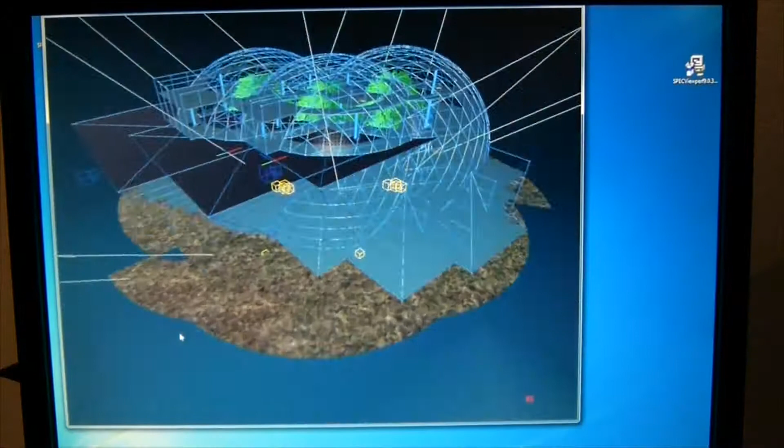So Intel's not in as bad shape as they could be, and honestly I think it's due to AMD screwing themselves over. That's something I messaged Coreteks about after his video - I sent him a giant wall of text, and he and I are going to have a discussion in a couple weeks about what he covered. He's right on all his points, but I think it ultimately comes down to AMD not knowing how to market - they just don't know what they're doing.

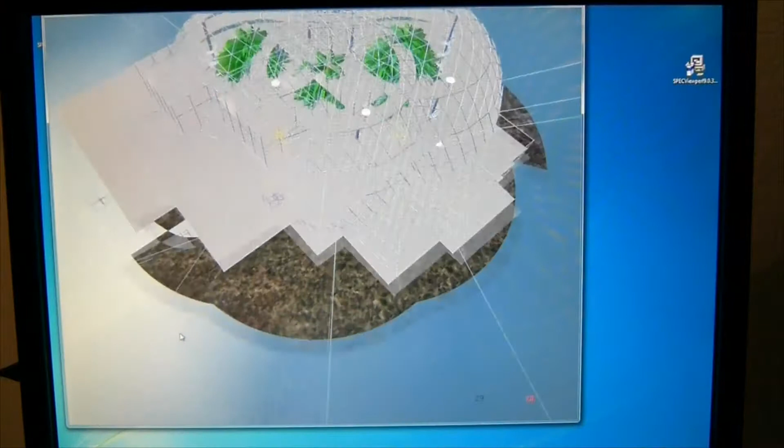I'll try to save some of the prediction stuff for what we expect next year. I do want to come back to the subject of threads and how long they'll last, but before that, I think I just took up the beginning of the conversation with expectations.

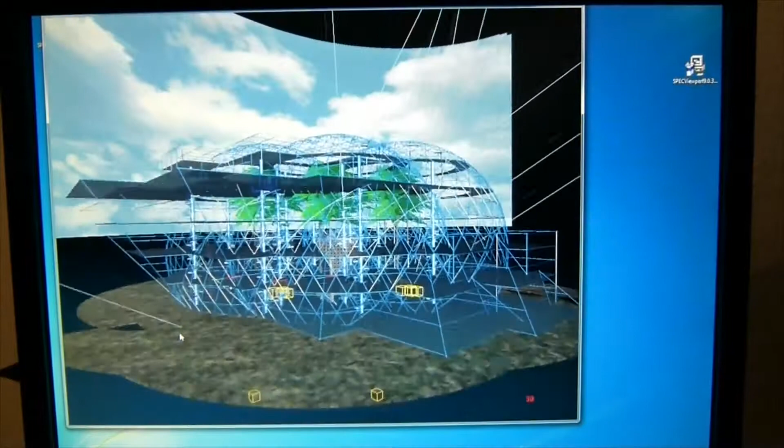To be honest, what I remember at the turn of the beginning of this year was that the hype around AMD was at a fever pitch, more than I've ever seen. Terrible Q1 earnings, but it still spiked up through the roof. Nobody cared - that's how good expectations were, that even a poor earnings call and everybody just bought in. And everyone was just non-stop talking about Navi and Zen 2.

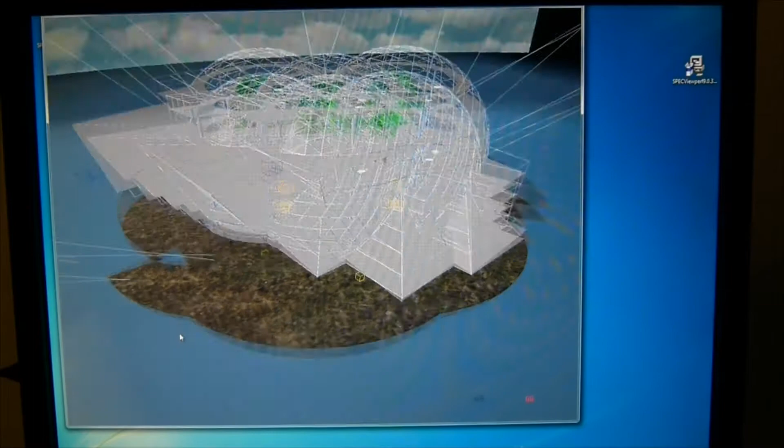Which I'd say in retrospect, I think Zen 2 met expectations. I know some people don't think it did, but honestly it uses less energy than I expected, and it's better at certain things than a lot of other people expected. No, it doesn't hit 5 gigahertz though - that's really the only thing you can say, at least for the ones they're selling. I think we were expecting higher frequency but lower IPC. So we got higher IPC but lower frequency.

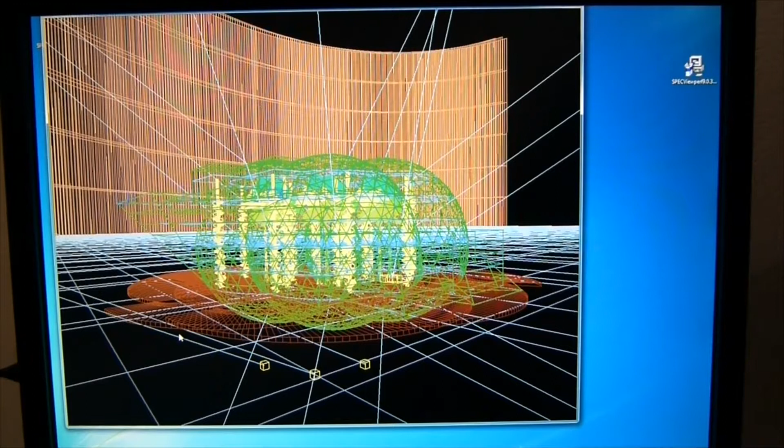So I agree, I think they hit the real-world performance targets that we all wanted them to. It just, they went about it in a slightly different way - instead of bigger numbers on the box, which people that don't pay attention don't really understand. But yeah, their IPC gain was huge.

If we're being honest, my first video - I made a couple that were terrible. In fact the first one I never even released. I might watch it with Dan and just release the audio in the podcast, and Dan can describe how stupid I look. But the one that actually got some views was 'Reality Will Catch Up with Intel.'

And I think this ties into what we were just talking about - I agree, for the next year Intel can get by doing what they're doing. They don't really care that much about Cascade Lake, and frankly they just sell those to OEMs. In that video I recently did talking about how they have a price for OEMs that's not even just half as much - it's really, on average, about a third as much as what they're charging on Newegg.

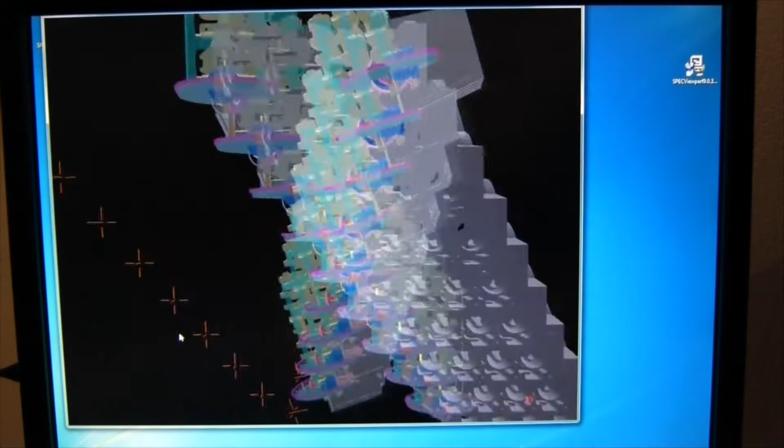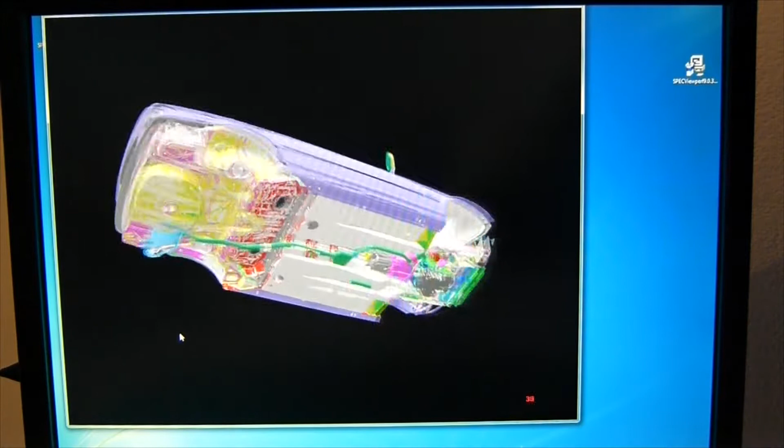You can never be sure with that, and Zen 3 could be that little bit more needed to push things over the edge. Something I talked about in my last podcast near the end there is worse - the difference in gaming performance between the 3600 and the 9900KF, something almost triple the price, is like 15%. I don't know, it's about 5%. Yeah, it's 5%. So here's Intel's race against time.

AMD right now just completely clobbers Intel in everything but gaming. But people will buy those CPUs if they game 5% better. They will, and Intel's got the name brand recognition.

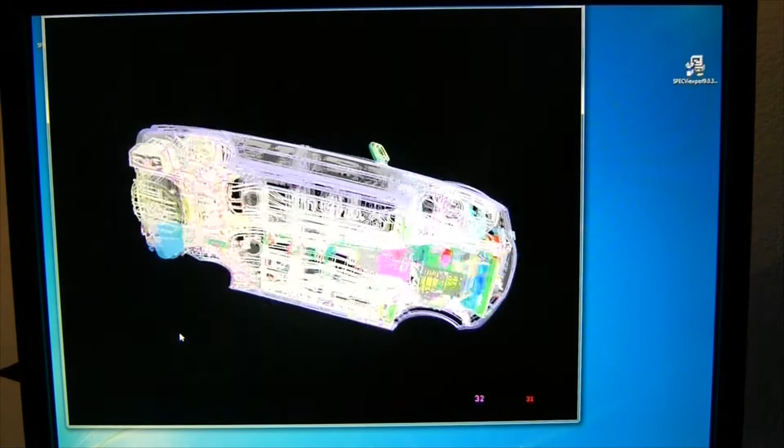However, if AMD's Zen 3, it's a new architecture, they're redesigning the CCXs - if that gets 10% more IPC, which I don't think is out of the question, and it does get at least what they say, about 100-200 megahertz higher, if the problem isn't that the 4900X 12-core now beats the 9900KS in gaming - that's not the problem for Intel. The problem for Intel is that when you move up AMD's single-threaded performance by, let's say 15%, or even just 10, now AMD's $200 CPU beats Intel's top chip probably at everything.

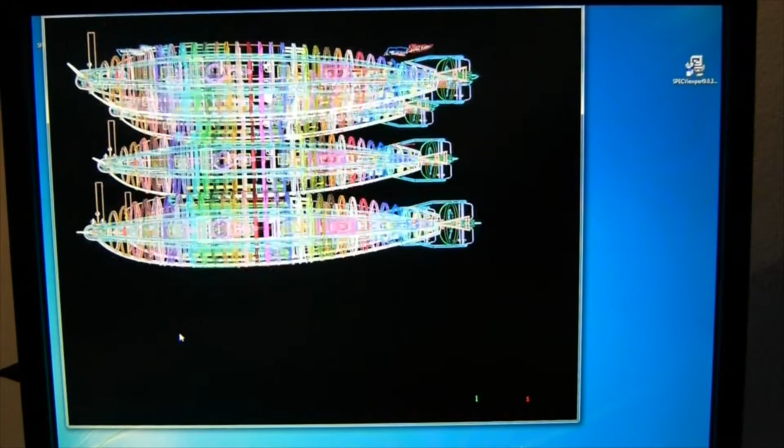That's the problem Intel has to worry about at the end of next year, I would say. So I'm thinking they get away with it for now. But as things stand, their AMD lineup's a joke. At least in Europe, people are buying AMD in larger numbers. Seem more discerning than us, I guess. I don't know. And once you move that single-threaded up by 10%, it's just complete game over, not just in the high end, but it's like what you price a 9900 at.

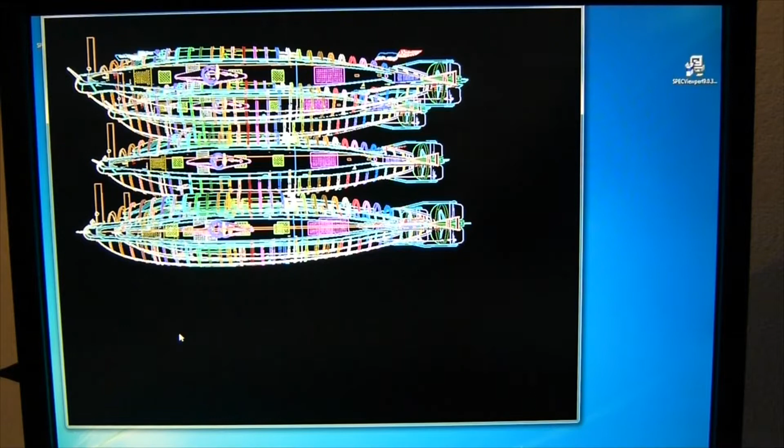If they feel that, okay, yeah, they're beating us across the board, we're losing sales, well, we're just going to knock - or they'll probably do it in small increments. They'll knock like 25% off, get a bunch of sales, knock another 25% off, get a bunch more sales. They can just keep going down, and AMD could follow if they wanted to, or come out with cheaper SKUs or whatever. But honestly, I think Intel's just trying to wait out the clock.

Exactly, I think that. But there is a very real clock there that will affect them if they don't hit it. Right, but if you look at the Pentium 4 versus the Athlon XP and then the Athlon 64, it lost to both - pretty bad to the XP and then horribly to the Athlon 64. And that was a good 4-year period there that Intel was basically irrelevant.

They were completely worthless and worse at everything across the board. And they were still able to ride out that storm. The big thing was that they had to come back big. Now here's the thing, and this is the reason why 7 nanometer matters.

10 nanometer doesn't matter to Intel. It's not going to give them what they need. They need to get to 7 nanometer, before TSMC if possible, and before AMD can get their products onto it. And what they really need to do, their equivalent or whatever - yeah, they're 5 nanometer, yeah.

So they need to regain some sort of advantage, or just come out with an architecture kind of like what the Core 2 was, that was so much better than what AMD could possibly have. So imagine if Intel had a 200% IPC increase on their next CPU. It sounds impossible because we haven't seen such things in a long time.

Golden Cove should be 40% better or more than Skylake. And I think some people hear a 40% IPC increase and say that's impossible. I'm like, well, it's been a while since Skylake came out, guys. A 40% IPC increase in 2021 isn't just - that's expected. They better get at least 40% by then because AMD is increasing IPC too.

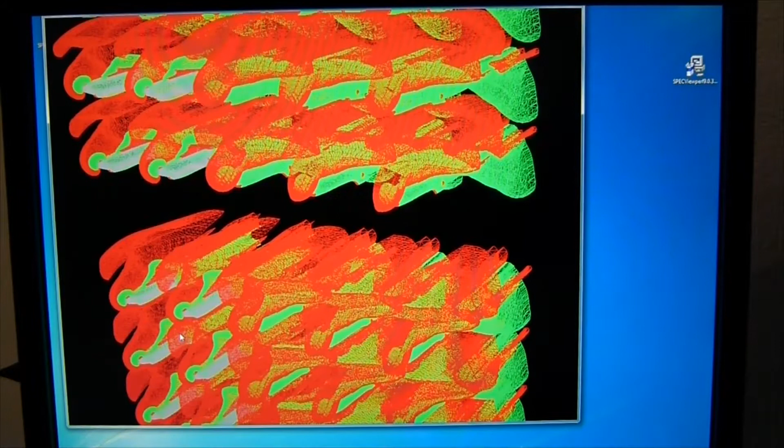Right, and with AMD constantly increasing IPC, Intel could come back in the game if they hit back hard - if they get the 3D stacking done first, there could be massive IPC gains there with on-die DRAM and stuff like that. That could get you a 100% IPC increase, in theory, if they do it right. That's what TSMC was talking about at Hot Chips for half the presentation.

It absolutely could. Yeah, if they come back and just make Zen 5 look ridiculously slow, even though it's such a massive leap for them, Intel over Intel, it's not impossible, and as long as they have the time to get there, there's always that chance. So I think it'll be fine for them, and like I said, the most telling thing is the reaction on Wall Street.

The Q3 earnings for Intel was a giant boom, they just skyrocketed after their Q3 earnings. I was expecting AMD to have a similar reaction because Q3, Zen 2 was out, Navi was out, so that should be factored in. And they did not care. AMD's stock is up since earnings, but it dropped immediately as soon as earnings came out.

Part of it's due to the fact that AMD doesn't know how to sell and market. I actually read the earnings report because I lost $200 on AMD that day. I'm like, come on guys. It was mostly due to the fact that they don't know how to present their own information. They might be very smart, very technically engineered, their engineers might be very good, but they don't have a single person in there that knows how to sell anything.

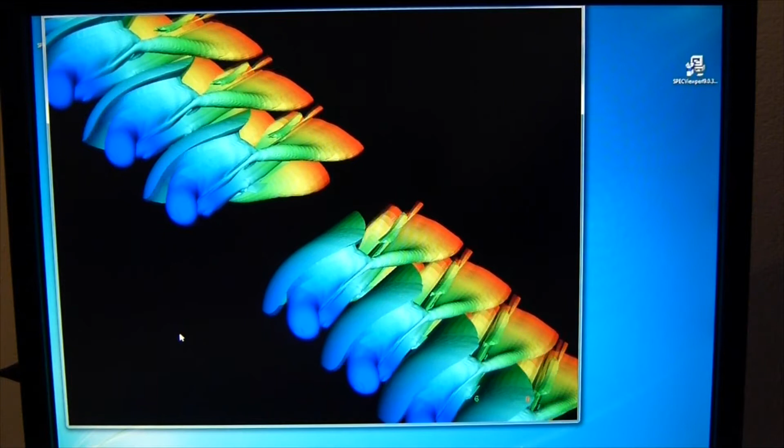What they did is they lumped their enterprise sales with their semi-custom. So we're at the end of a console generation, so their semi-custom could be down like 8,000%, going through the floor. So what that did is they took all of their EPYC sales, all their Rome sales, and dragged that through the floor with it. It made it look like they were losing so much ground in the server market.

Now for those of you that don't play in the stock market, you have literally 3 seconds to read this giant report and make up your determination whether or not you're buying or selling if you're already in. So you have to be super fast with this, and when you see the highlighted numbers...

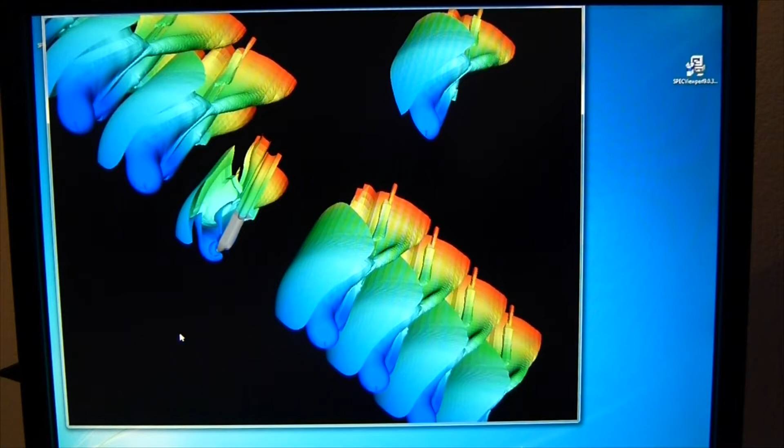Good point, I agree, they were terrible marketing their graphics sales too. Correct me if I'm wrong, I basically skimmed the report, but one thing I thought I saw was that their graphics sales overall were flat, despite being way down in professional graphics sales. Was that correct? Honestly, they lumped that in with their CPU sales, and that actually looked like it was up on the quick uptake. I didn't dive that deep into it because basically they hit their projected targets overall, so it was a wash. But they lumped CPU, like desktop CPU and GPU all in one category.

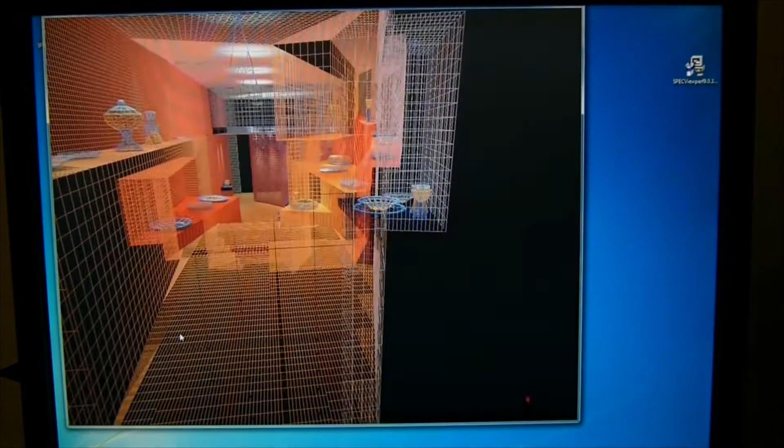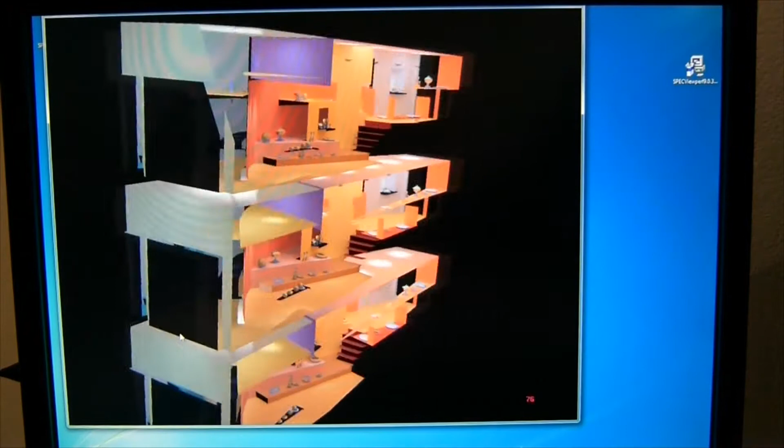Well, yes, but what I believe I read is that they don't make nearly as much money from their professional graphics as they do from EPYC, not yet at least. And I believe their graphics sales in the professional market were substantially down, way, way down, and yet they basically broke even on graphics sales, meaning Navi's selling so well to gamers that it made up for that downturn in the professional graphics market.

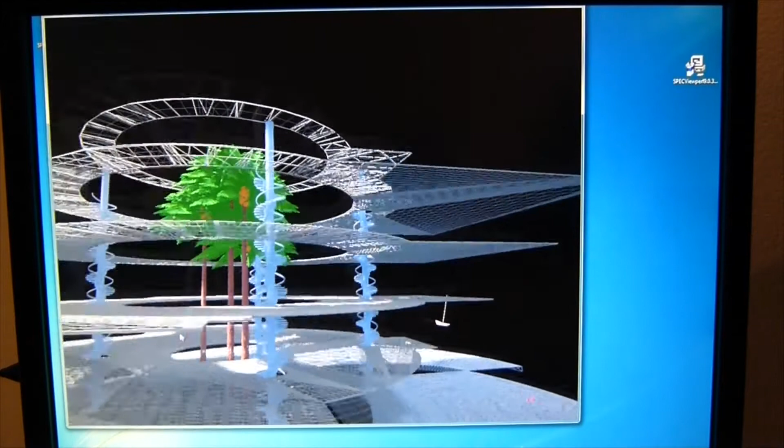Which I thought a lot of people overlooked, I saw maybe one analyst talk about that. So Navi at the very least is also selling gangbusters compared to their previous gens, and they basically just glossed over that. I think that's a very big deal long term that they don't even have a flagship. I mean, yeah, I guess their flagship is the 5700 XT right now.

Graphics card competing, and yet they're managing to make more money in consumer graphics than they've made since, what was it, 2014 or something? Well, it was the most revenue that they made since 2005, company-wide.

But yeah, as far as the individual graphics stuff, I didn't dive that deep into it, because honestly, to Wall Street that doesn't matter. The biggest thing is the server side, that's where the real money is, and professional graphics on AMD don't actually matter.

Well, and I don't blame AMD for charging more for Threadripper, and I think next year really is the year where you're just going to watch Intel's prices continue to slowly go down as they have, well, absolutely nothing in the desktop space. And you're going to see AMD raise margins, at least for next year, because they need to get as much money as they can before 2022, since Intel has nothing. That's kind of what we're seeing here. And people pay whatever they want for Threadripper, by the way. I see it.

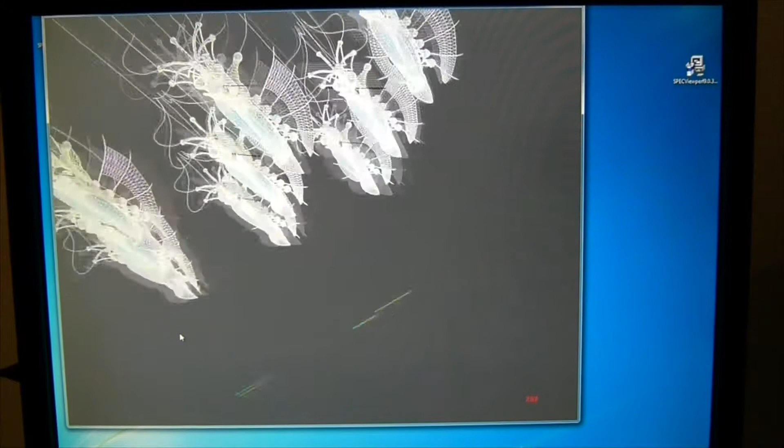I actually don't agree that there's that much to complain about with Threadripper. They increased prices on the 24 core by $100 or something versus the previous gen, but because of how Zen 2 works, it's 50% better. That's a 50% year-over-year performance increase for 10% more budget and platform cost, where the competition has quite literally nothing. It's so funny how little Intel has in that market now.

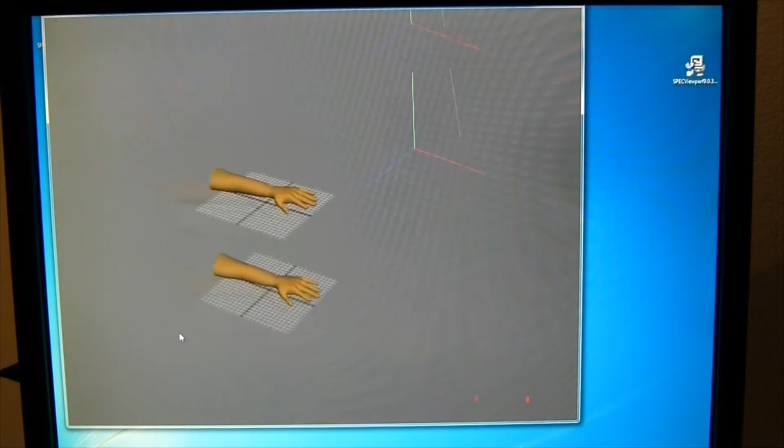I think the real gripe, like from Coreteks' video, is the fact that AMD's been buying goodwill with Zen 1 and Zen Plus. Basically, they were underpricing their CPUs to try and buy goodwill, and now that they're in the lead, they have the technological advantage.

That goodwill, they don't need to buy anymore. It's either you want the best, you pay for the best. They could have charged whatever they wanted. If they wanted to, they could have charged $4,000 for the 32 core and been like, buy it or don't. And what are your options? Well, your option is a $3,000 28 core from Intel, right?

That's the funny thing, AMD's done being a budget option, unfortunately, I think, across the board. But they're always going to try to give you better price performance for the time being. The 32 core is $1,000 cheaper than Intel's 28 core. Can you really blame them? That's my opinion. Yeah, I actually thought they were priced a little bit cheap, but it keeps it in line with the mainstream desktop parts. So this way you have kind of an upgrade path. If 16 cores won't quite cut it, you spend a few hundred dollars more and get 24, a few hundred more and you can get 32. So yeah, it definitely makes sense.

I also think AMD is charging far too little for their EPYC CPUs. Their max CPU is a little bit under $7,000, while Intel's is like 14, so they're charging half as much as Intel. I don't think that's going to last long either. I think you're going to see Zen 3 increase prices by some amount, enough that people will swallow it because a lot of servers are switching to EPYC, but they definitely wish they would have charged more.

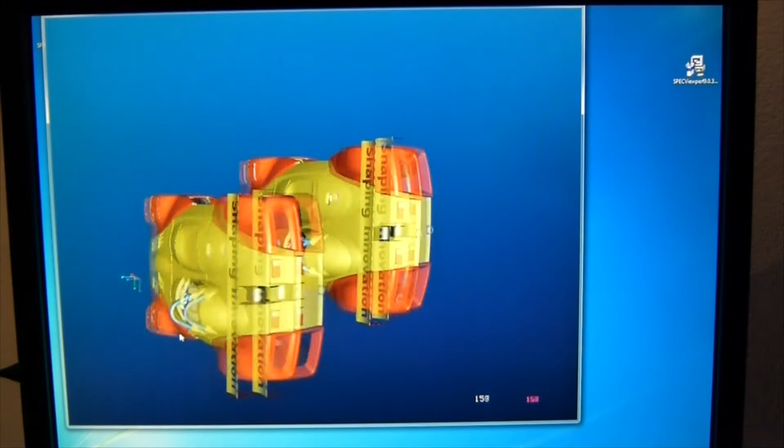So I understand it, being an account manager in the automotive industry, there are some accounts where it's like, I'm tired of taking this long to win this business. We're going to be aggressive this time. Could we maybe charge more? Maybe, but we need to take this market share right now, and I think that's what they did. In hindsight, they should have definitely charged more though for EPYC.

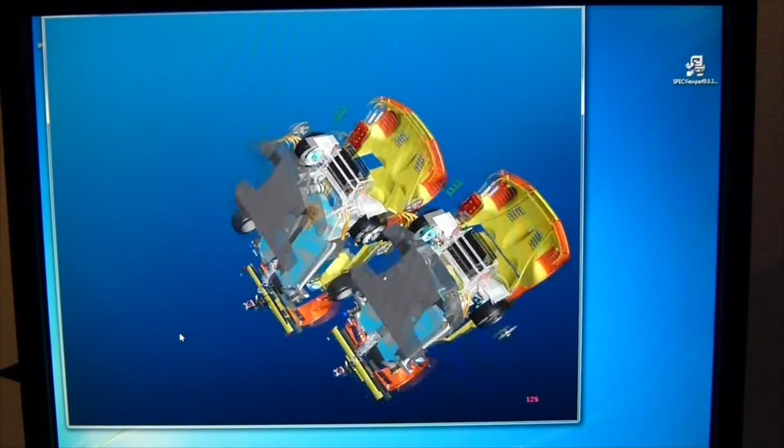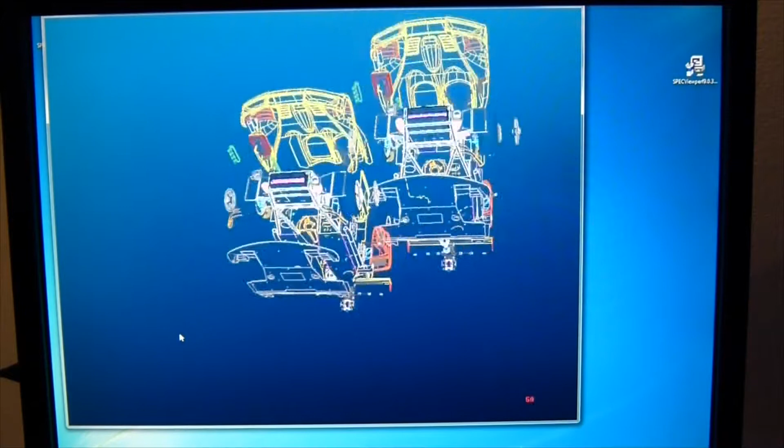It was never that much about the price either, at least from anyone I've talked to in the server space. It's really just about, can I rely on this? Is this worth the effort to switch over time? Right, they almost never mention price, actually. They do eventually, but that's because most of the people you or I would speak to, they don't pay the bill. Yeah, they just say, this is what I need, and then some accountant somewhere pays the bill. So it's ultimately down to, will it work? Price is pretty much irrelevant.

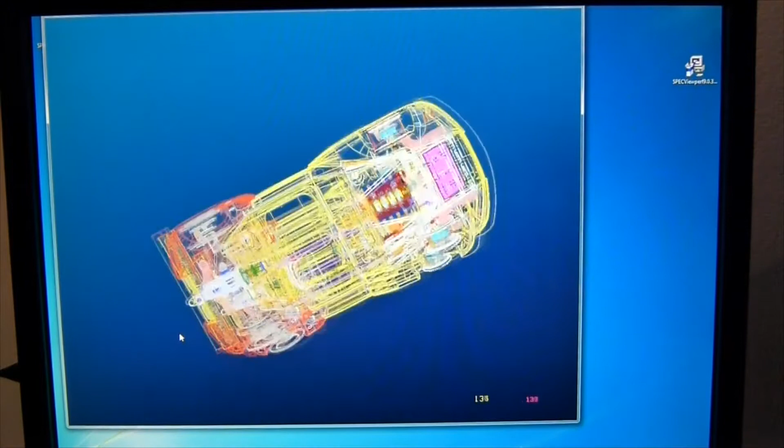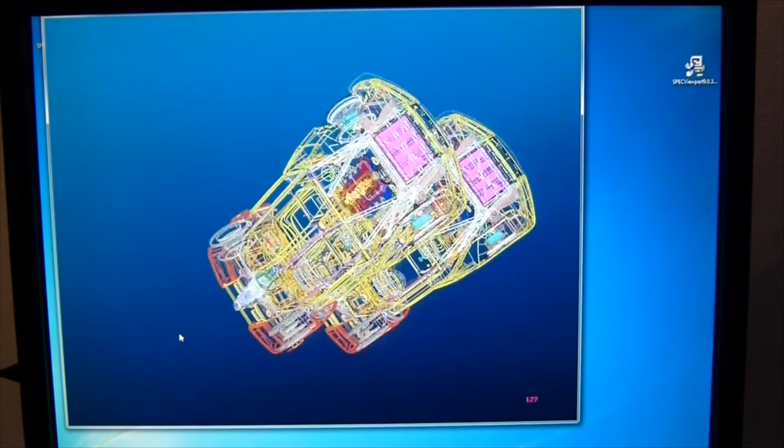And that's the reason why we're seeing a lot of prices being inflated. My perspective on the tech industry has evolved once I started realizing that there are so many businesses out there where it doesn't matter what it costs. So the tide's always going to continue to rise, is the way that's going to work, and we're going to continue to go up and up unless new competition comes in, which is what we started this conversation about. That's the only thing that could disrupt it enough to where it's like, okay, we got to pull back because now we have to compete against this other guy over here.

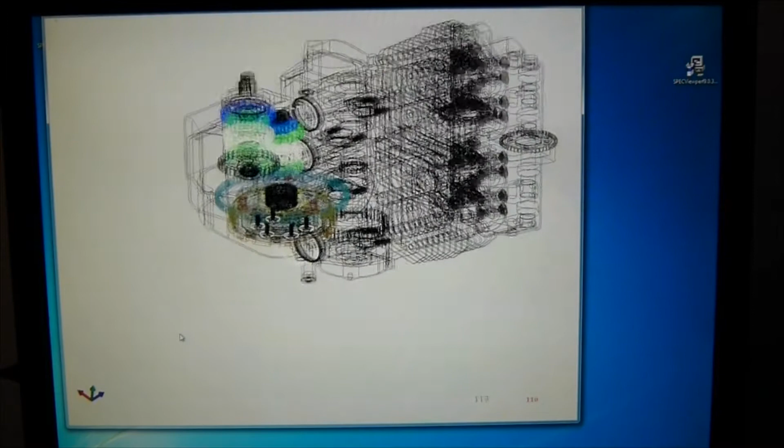On the consumer side, the way I started looking at things is you just have to pick a target price point. For me, the $200 CPU market is where the mainstream CPU needs to be. I don't care how much faster or slower it is next generation, it doesn't matter, as long as it does what the average person needs and costs $200 or less. So the 3600 definitely fits that bill. This is when Intel got into trouble, when the $200 i5s stopped being good enough because there weren't enough threads. Once that happened, the CPU market became an issue for gamers. Once we had 4-core 8-thread or better, 6-core 6-thread, or 6-core 12-thread now at that $200 price point, CPU is no longer relevant. You shouldn't be spending more than that as a mainstream gamer.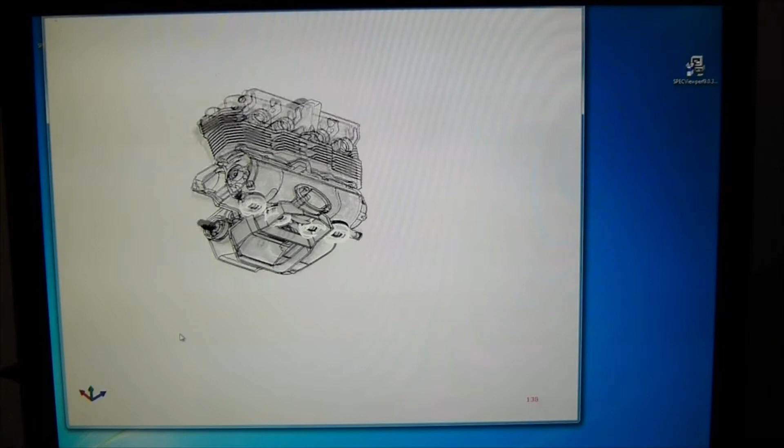And then on the GPU side, it's really between the $200 and $400 price point. Anything beyond that is basically just irrelevant because they'll just keep inflating prices. Like we talked about in our last video, if they want to charge $10,000 for a GPU that's 15 times stronger than a 2080 Ti, who's to say that they can't?

And someone will buy it. Somebody will buy it, yeah. I guess I'll say this.

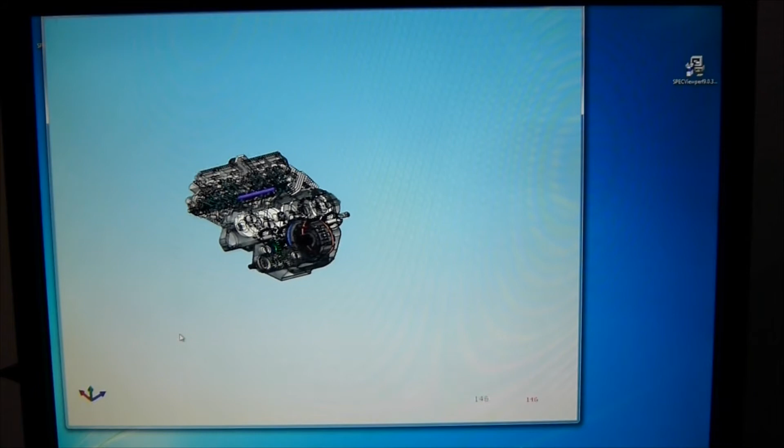Did you expect anything stronger than the 5700 XT from AMD before the end of the year? I figured that they could do it if they wanted to, but after looking at the situation, it doesn't make sense for them. That's what I think's going on.

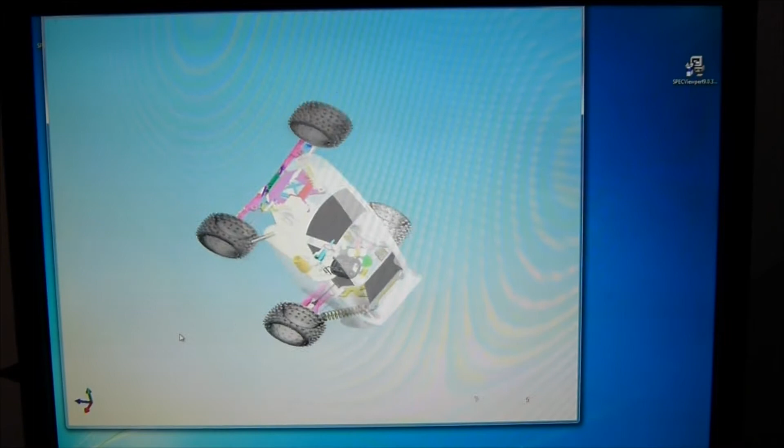I always find it hilarious, you'll see this in tons of forums where fanboys just go, AMD can't even compete, why do they bother? Why do these AMD fans think AMD can compete with the 2080 Ti? There's no way they'll make a card that strong. And I'm like, you really think it's that hard for this multi-billion-dollar company to make a product 30% stronger than what they have now? You don't think they could do that? I think they could. They just don't care. That's really what it comes down to.

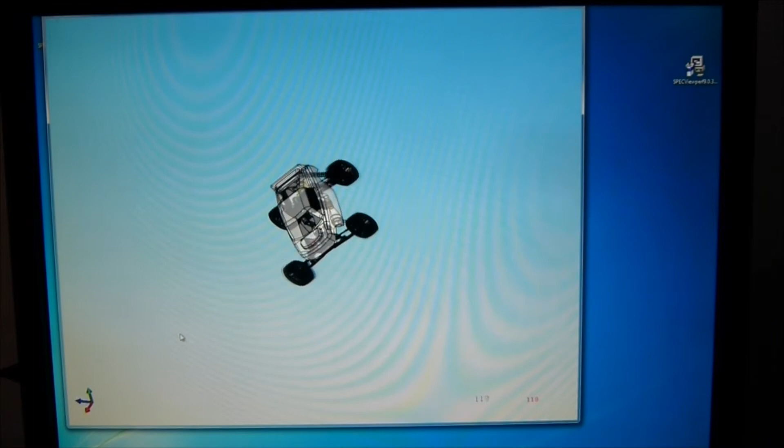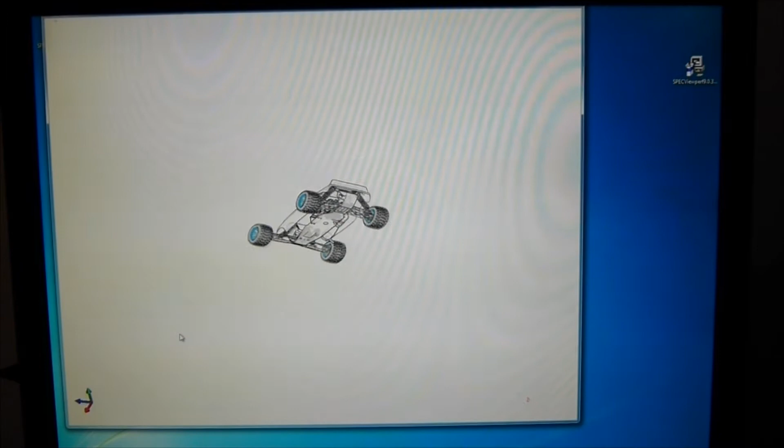That's one of the big things I'm going to be talking with Cortex about, honestly. I laid out what I just said about how NVIDIA is doing things right. AMD kind of jumped the gun, I think. Going to 7 nanometer really hurt them. As much as the hype built up this year, I think that's what ultimately really hurt them, the fact that these cards came out so late.

They're basically halfway through the 2000 series generation, so we know the 3000 series will be out in 6 to 9 months from now, and we only have one chip from AMD. And the fact that their 7 nanometer wafers are becoming a premium, they're literally wasting their time building GPUs because they're making many thousands of dollars on EPYC CPUs. So it's like, why waste the fab space or capacity on GPUs?

That's the reason why I think they decided not to build a big chip. They decided to go small because they can get a lot of them out per wafer, plus laptops is a big deal. So I think that's why the 5500 is coming out. But I don't even think they really wanted to do the 5500. I'm honestly entirely surprised that's built on 7 nanometer. I really thought there was a chance they would put that on Global Foundries' new 12 nanometer FDX, which is about as efficient, so it'll be fine.

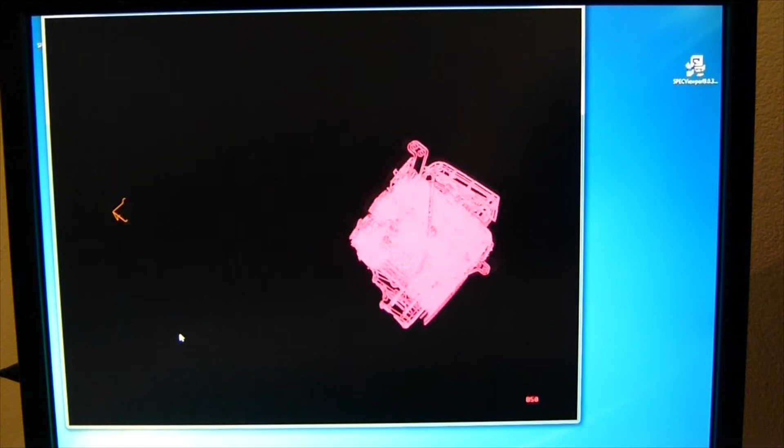The die would be bigger because it's on 12 nanometer instead of 7, but it's something that actually confused me. I was very surprised that everything so far with Navi is 7 nanometer, that they haven't even done some kind of updated porting, like a smaller Vega or Polaris card, then just call it the 5500, maybe give it some of the new RDNA features. Because putting everything on 7 nanometer doesn't make any sense.

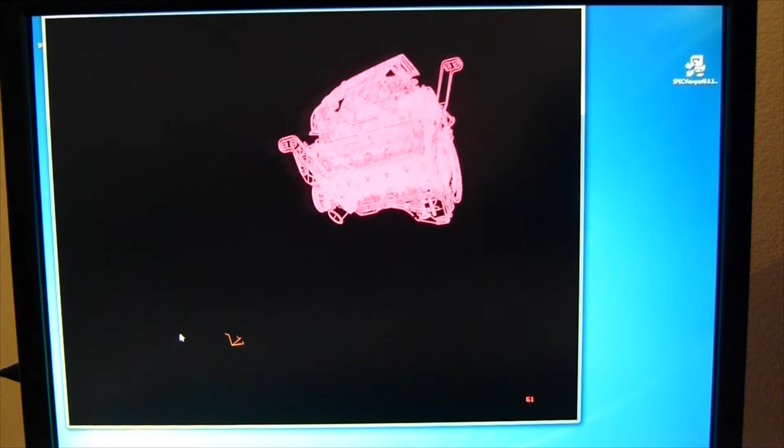Look at the 5500, that's around 150 millimeters squared, I believe. So that's twice as big as a Zen 2 chiplet. No, I don't think it's quite that big, I thought it was about 100 millimeters squared. It's bigger than a Zen chiplet. Oh yeah, and they're not making Zen 2 chiplet profit margins on this thing. Nope, so that actually surprised me.

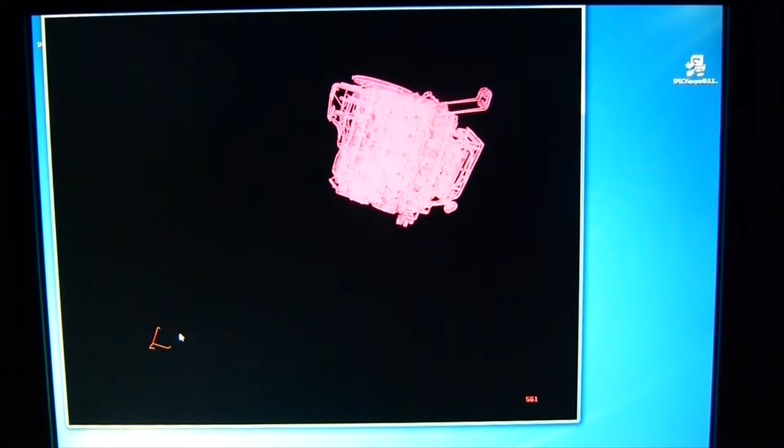I will say I'm surprised there wasn't some bigger Navi, because they could have done it. But if there's not going to be a bigger Navi, I'm surprised they're releasing a smaller one on 7 nanometer. They don't need 7 nanometer to compete with NVIDIA's low end. NVIDIA's low end is a complete joke. They could have put it on anything, really. And I'm assuming they already invested in getting it onto 7 nanometer.

This is really where AMD has a bit of an issue, they're not very malleable. Like how you said, why not switch it over to the 12 nanometer? That would have made a lot more sense. They should have actually launched the whole Navi RDNA lineup on 12 nanometer at Global Foundries or TSMC, it doesn't matter where, but keep the fabrication on 7 nanometer going.

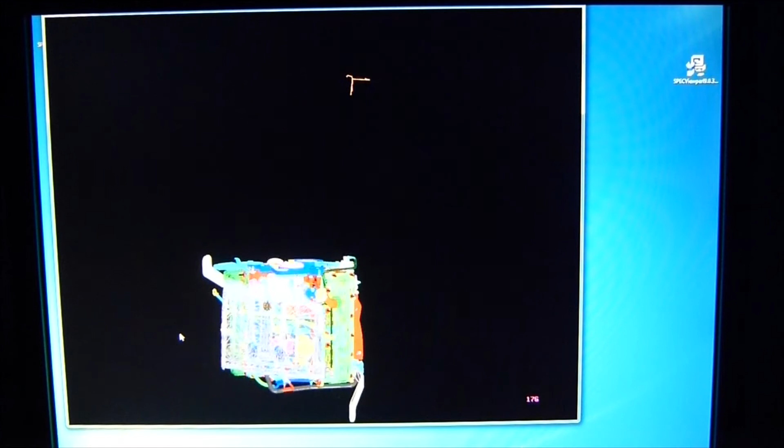But they just don't want to invest however many more millions of dollars it is to get that going, because their graphics division overall isn't going to be that profitable. So I just don't think that they want to put the investment in. So they're like, screw it, we'll just make whatever we can make.

For the most part, they just want to get these to OEMs and get them into laptops. That's the big thing - they want a presence in modern day laptops.

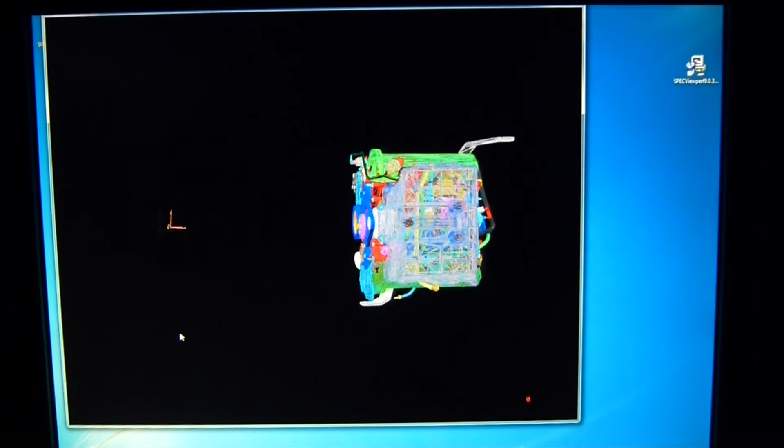I thought that was hilarious, the TDP difference - or I guess they're now using TBP for the 5500 - the mobile version will use around 50 to 75 watts, and then the desktop is like 110/150.

It's like they're definitely giving desktop users the worst deals. They just don't care. But again, they really don't need to care, right?

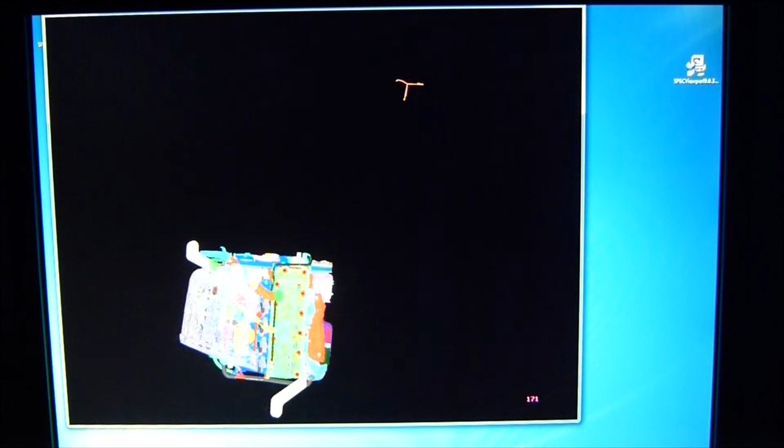That's one thing, looking back on this year, I think I misjudged - I thought Navi had... so the original launch leak from Adored, I think we both agree it was at least a legitimate leak, no matter what panned out from it. The original leak was that Navi, the Navi you see in the 5700, would be clocked lower, it'd use about 100 watts, and they'd sell for 300.

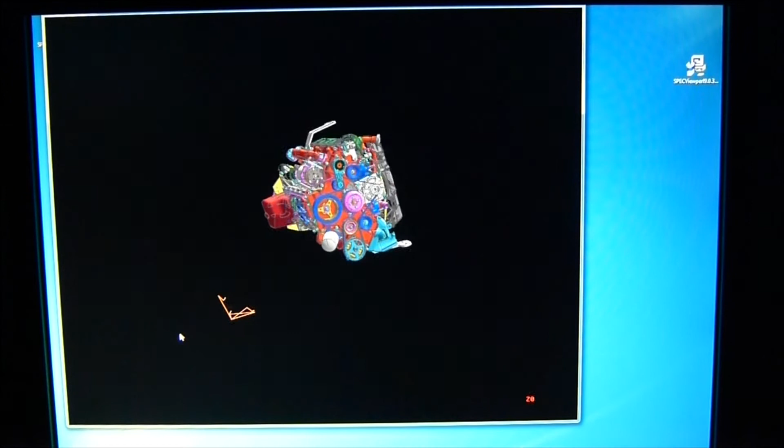And I do think that was their initial plan - we are going to make this way more efficient than NVIDIA, sell for $300 - but they have problems with the larger dies. And as we know now, they said screw the larger dies, we got the smaller ones working, let's overclock them and sell them for 2070 prices.

Why not? Why not sell them for that much? It won't be any more efficient than NVIDIA's current gen cards, but why do we care? People will buy it anyways if the performance was there.

And I thought people wouldn't. Well, it turns out people will buy Navi this time. And I guess it's because AMD is perceived as a decent company now.

And for this year, it was very funny watching AMD's overall mind share just get them a lot of sales in all their departments. Whereas before - it is annoying though to think - so we were right, it was mind share, now they're selling graphics cards over twice the quantities of their previous gens.

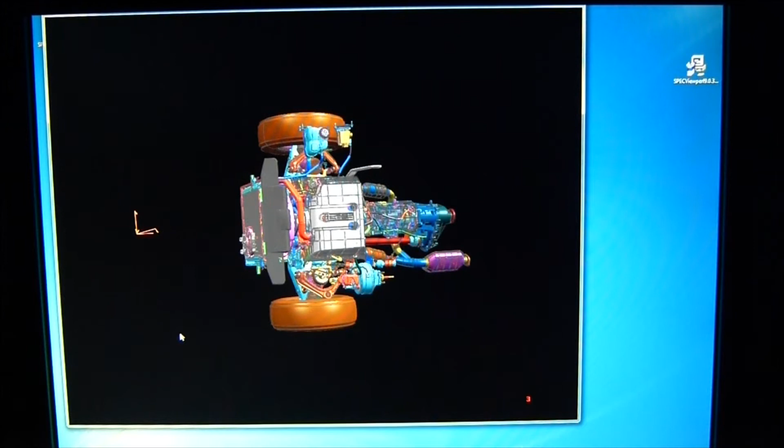Doesn't matter that the 7000 series, let alone the 6000, the 5000, the 4000 series were so much better price performance than NVIDIA. No one cared. Now they have the mind share. Yep, now sales are good.

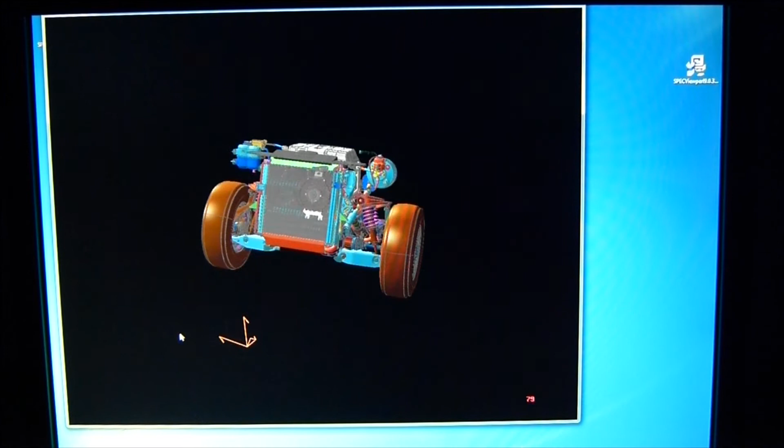Well, I mean, it's been a while since AMD's been on parity. You and I have talked about it, and this is the reason why we took issue with the 5700 XT reviews, because we're like, guys, it draws the same amount of power, and shader core to shader core, it performed roughly the same. So it's like, what were you really expecting here?

I mean, I was expecting better power efficiency personally. But again, the original leak, they were clocked lower, and supposedly - if you believe the leak - they were going to put like a 48 compute unit card at the level they put the 5700, but it was going to be clocked lower and a lot more efficient.

And I think once again, just like Polaris, they overclocked the snot out of it to get as high of a price as they could. Oh yeah, I mean you can definitely see the 5700 XT - the only reason why it draws so much power is because it's clocked too high. The regular 5700 is actually infinitely more efficient.

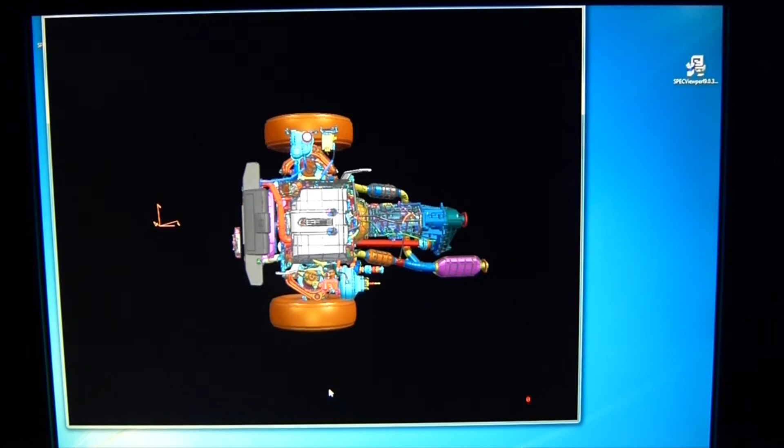I think it trades close with like the RTX 2060, not even the Super. Like, it's actually about as efficient as this.

What they did is - agreed, they were terrible at marketing the graphics sales too. Correct me if I'm wrong, I basically skimmed the report for all of it.

So it made it look like EPYC was not doing well, because at the end of the day, nobody really cares about consumer grade stuff.

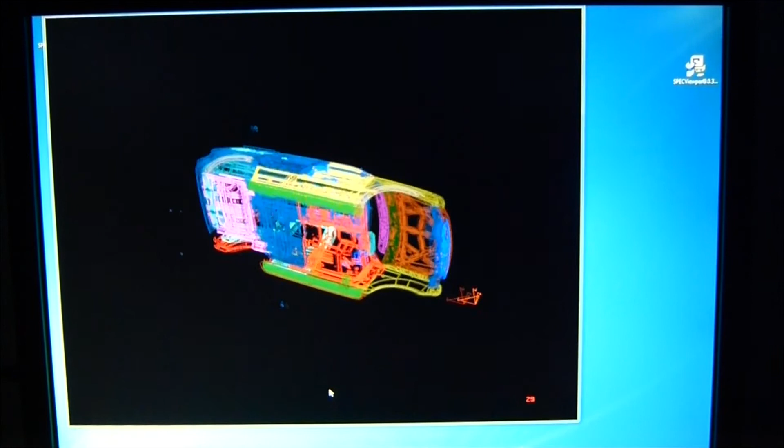Well, yes, but what I believe I read is that they don't make nearly as much money from their professional graphics as they do from EPYC, not yet at least. And I believe I read their graphics sales to the professional market were substantially down, like way, way, way down.

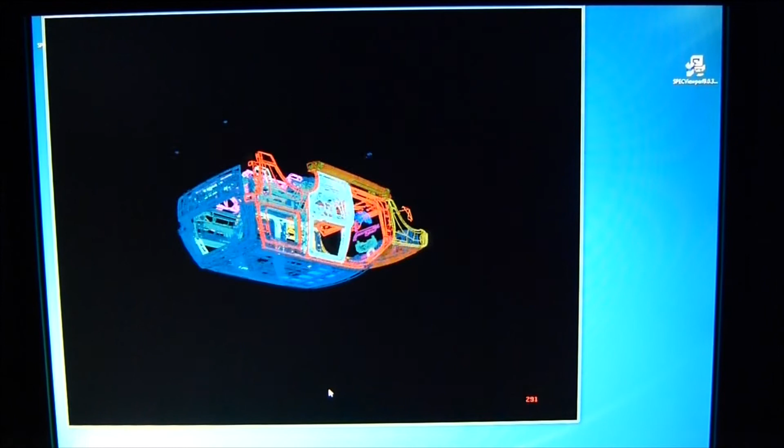And yet they basically broke even on graphics sales, meaning that Navi's selling so well to gamers that it made up for that downturn in the professional graphics market, which I thought a lot of people overlooked.

I saw maybe one analyst talk about that. I'm like, so Navi at the very least is also selling gangbusters compared to their previous gens, so they basically just glossed over that. I mean, I think that's a very big deal long term, that they don't even have a flagship.

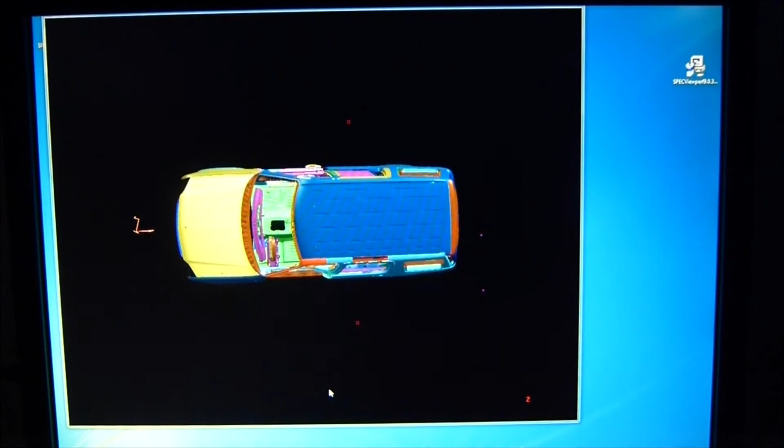I guess their flagship is the 5700 XT right now, competing in graphics cards, and yet they're managing to make more money in consumer graphics than they made since, what was it, 2014 or something? Well, it was the most revenue they made since 2005, company-wide.

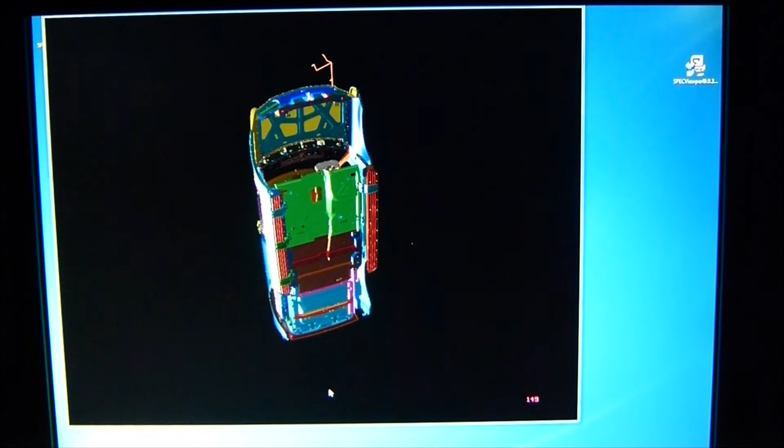But yeah, as far as the individual graphics stuff, I didn't dive that deep into it, because honestly, to Wall Street that doesn't matter. The biggest thing is the server side. That's where the real money is, and professional graphics on AMD don't actually matter.

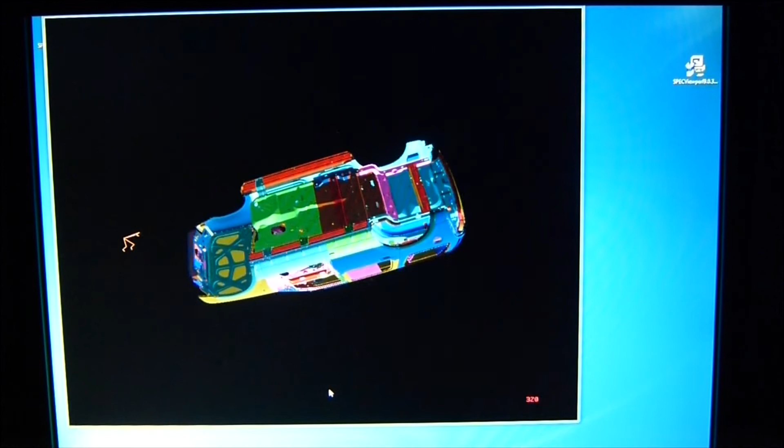I don't blame AMD for doing more for Threadripper, and I think next year is the year where you're just going to watch Intel prices continue to slowly go down, as they have absolutely nothing in the desktop space. And you're going to see AMD raise margins, at least for next year, because they need to get as much money as they can before 2022, Intel has nothing. That's kind of what we're seeing here.

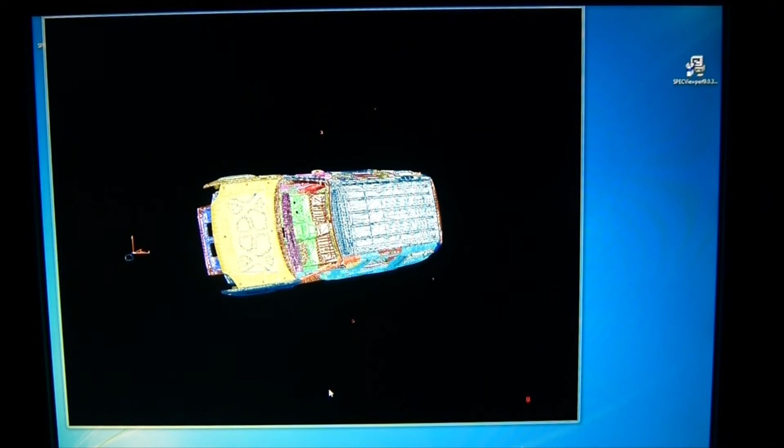And people will pay whatever they want for Threadripper, by the way. I actually don't agree that there's that much to complain about with Threadripper. Think about it, they increased prices on a 24 core by $100 or something versus what they were selling at previous gen, and because of how Zen 2 works, it's so funny how little Intel has in that market now.

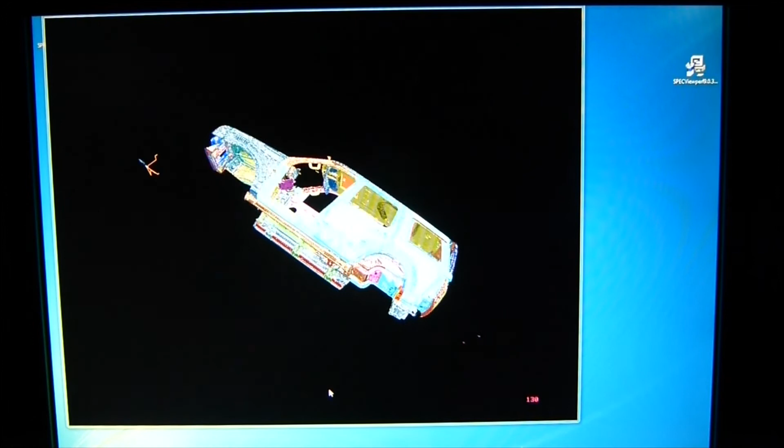I think the real gripe, like from Coreteks' video, is the fact that AMD's been buying goodwill with Zen 1 and Zen Plus. Basically they were underpricing their CPUs to try and buy goodwill. And now that they're in the lead, they have the technological advantage, that goodwill means they don't need to buy goodwill anymore. It's either you want the best, you pay for the best.

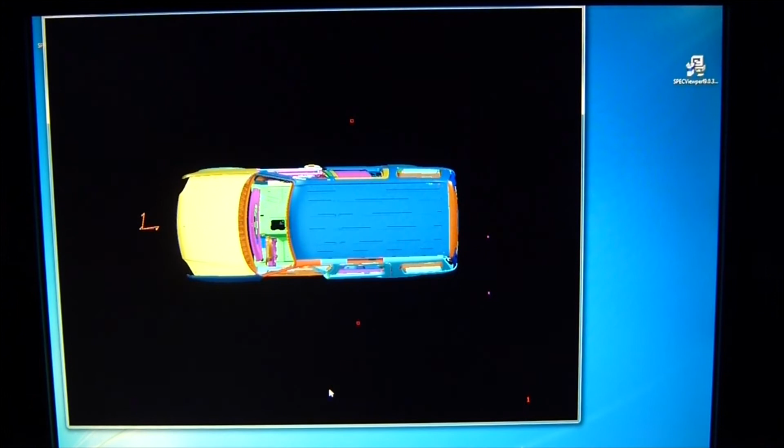And they could have charged whatever they wanted. If they wanted to, they could have charged $4,000 for the 32 core and been like, buy it or don't. And what are your options? Well, your option is a $3,000 28 core from Intel, right? That's the funny thing, people. AMD's done being a budget option, unfortunately, I think, across the board.

But they're always going to try to give you better price performance for the time being. The 32 core is $1,000 cheaper than Intel's 28 core. Can you really blame them?

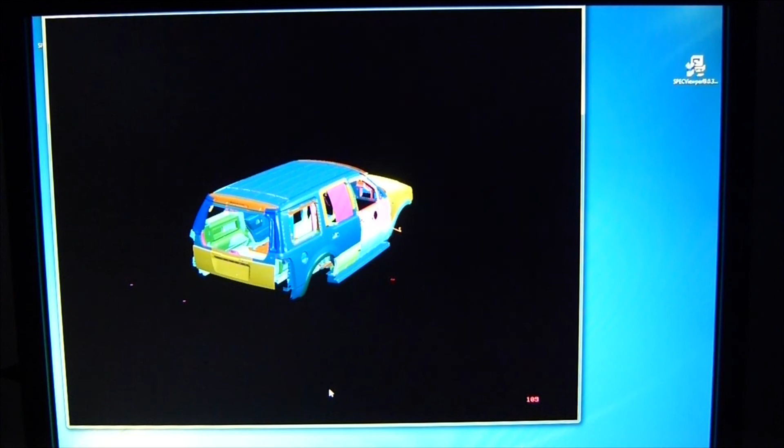That's my opinion. Yeah, no, I actually thought they were priced a little bit cheap, but it keeps it in line with the mainstream desktop parts. So this way you have kind of an upgrade path. If you're like, 16 cores won't quite cut it, you spend a few hundred dollars more and then you got 24, a few hundred dollars more and then you can get 32. So yeah, it definitely makes sense.

I also think AMD is charging far too little for their EPYC CPUs. Their max CPU is a little bit under $7,000. Intel's is like $14,000. So they're charging half as much as Intel. I don't think that's going to last long either.

I think you're going to see Zen 3 increase prices by some amount, but enough that people will swallow it because they are still, a lot of servers are switching to EPYC. But they definitely wish they would charge more. I get what they did there though - AMD needs to take server market share now. That's their goal. Intel has nothing for a few years, but only a few years. They will come back with some pretty powerful stuff.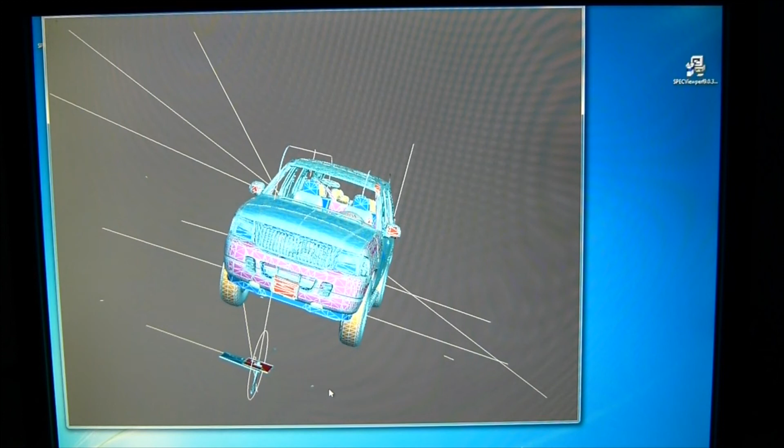So I understand it, being an account manager in the automotive industry, there are some accounts where it's like, I'm tired of taking this long to win this business. We're going to be aggressive this time. Could we maybe charge more? Maybe, but we need to take this market share right now, and I think that's what they did. In hindsight, they should have definitely charged more for EPYC.

It was never that much about the price either, at least from anyone I've talked to about servers. It's really just about, can I rely on this? Is this worth the effort to switch over time? They almost never mention price, actually. They do eventually, but that's because most of the people that you or I would speak to, they don't pay the bill. They just say, this is what I need, and then some accountant somewhere pays the bill. So ultimately it's down to, will it work? And price is pretty much irrelevant.

And that's the reason why we're seeing a lot of prices being inflated. My perspective on the tech industry has evolved once I started realizing that there are so many businesses out there that it doesn't matter what it costs. So the tide's always going to continue to rise, is the way that's going to work. Things are going to continue to go up and up unless new competition comes in, which is what we started this conversation with.